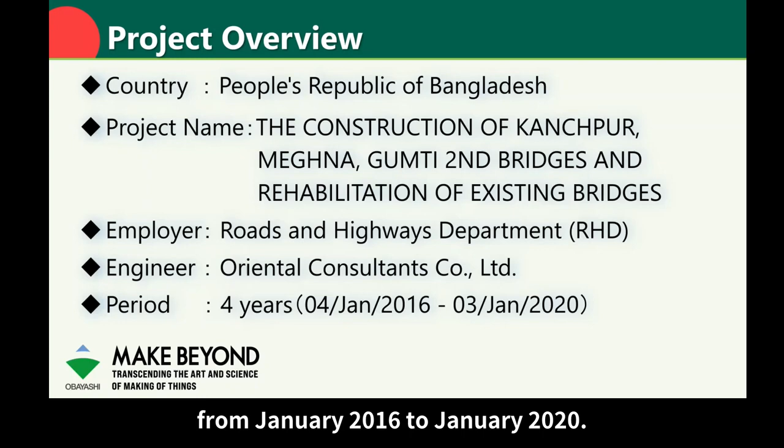I'm going to summarize the project. The country is the People's Republic of Bangladesh. The employer was the Roads and Highways Department of Bangladesh, and the engineer consisted of 9 companies, including Oriental Consultants Corporation. The construction period was 4 years, from January 2016 to January 2020. The contract scope was construction of new bridges and rehabilitation of existing bridges, including improvement of the surrounding area.

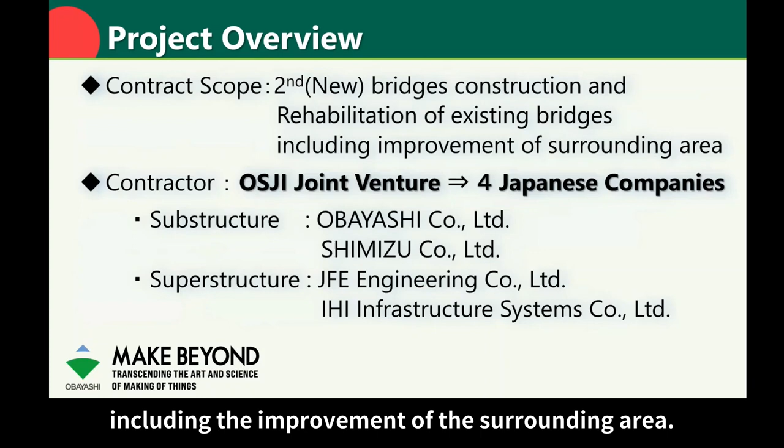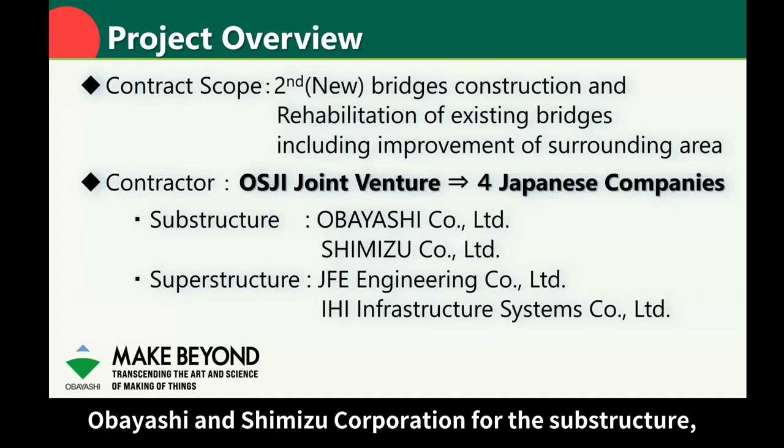The contractor was a Japanese joint venture of 4 companies, named OSJI Joint Venture: Obayashi and Shimizu Corporation for the substructure, and JFE Engineering and IHI Infrastructure Systems Corporation for the superstructures.

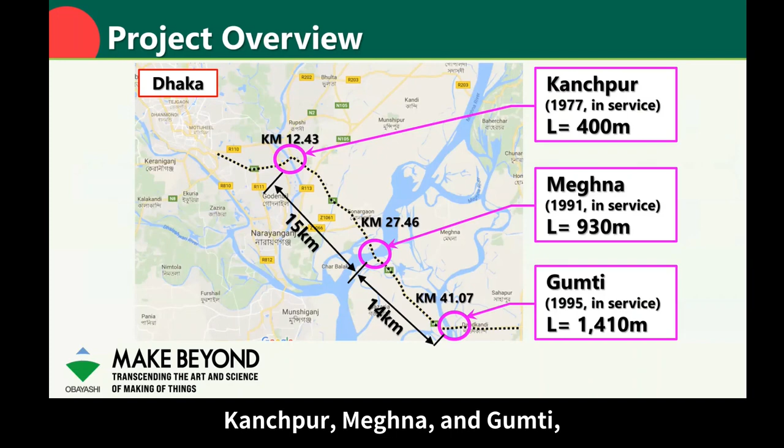The next is the project location. The 3 bridges are located at Kanchpur, Meghna, and Gumti, about 12 kilometers from the suburb of Dhaka, the capital of Bangladesh. This section explains the description of the new bridge construction.

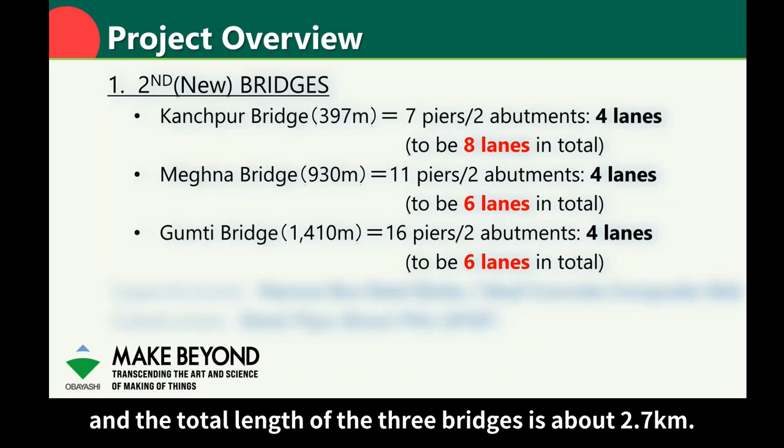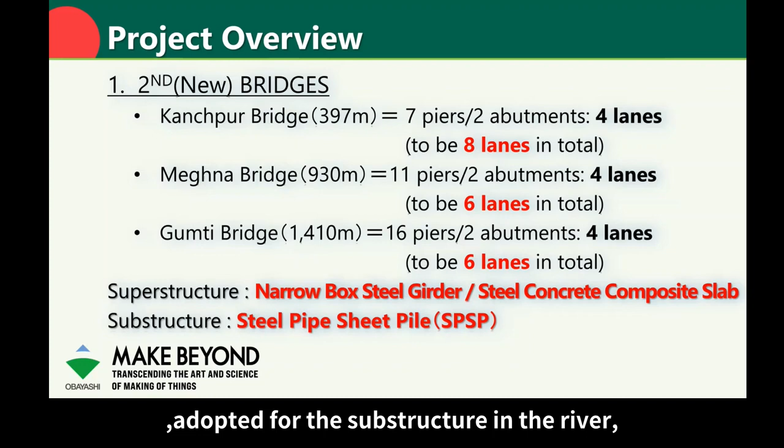The total length of the 3 bridges is about 2.7 kilometers. The superstructure is a combination of steel narrow box girder and steel-concrete composite slab, with steel pipe sheet pile foundation adopted for the substructure in the river, commonly called SPSP. This method was the first application in Bangladesh.

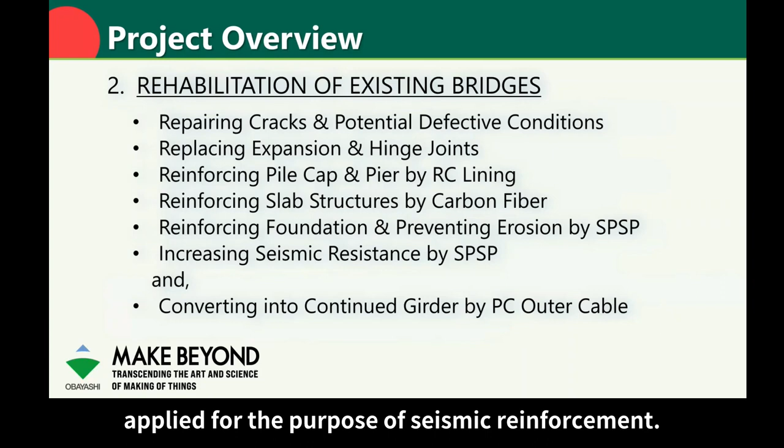Next, I will present the description of the rehabilitation of the existing bridges. As shown on the screen, 7 different treatments were applied for the purpose of seismic reinforcement. This was the first application of using carbon fiber for reinforcement and converting into continuous girder by PC outer cable in Bangladesh.

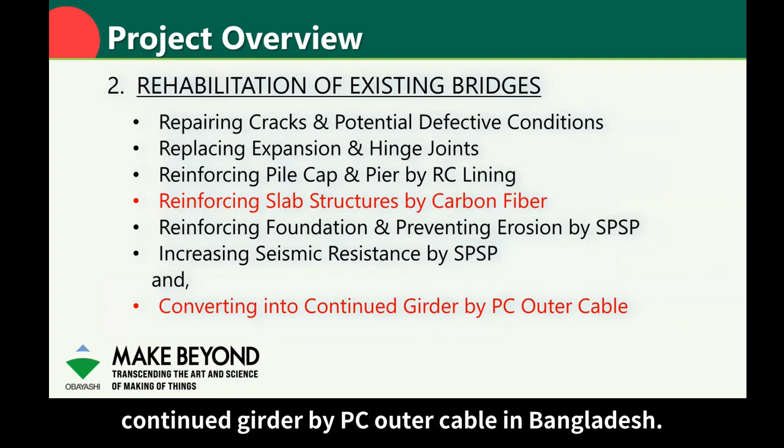This SPSP is a structure in which steel pipes are driven into the river and used not only as a permanent structure but also as a temporary closure wall to build the structure.

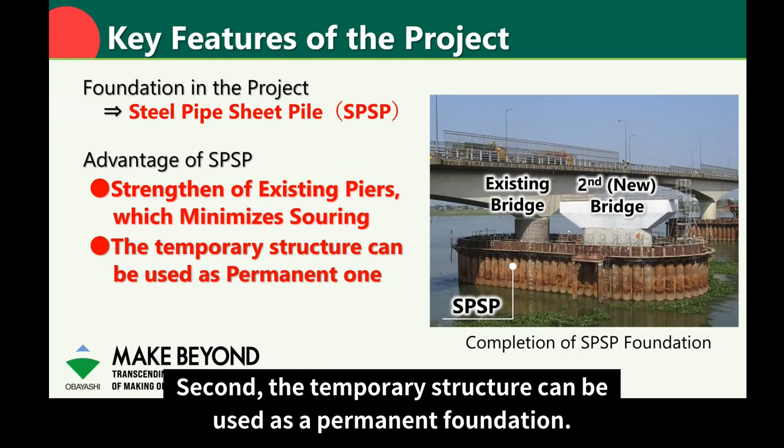There are 3 advantages of SPSP foundation as follows. First, strengthening of existing bridge piers, which minimizes scouring. Second, the temporary structure can be used as a permanent one. Third, it shortens the construction period.

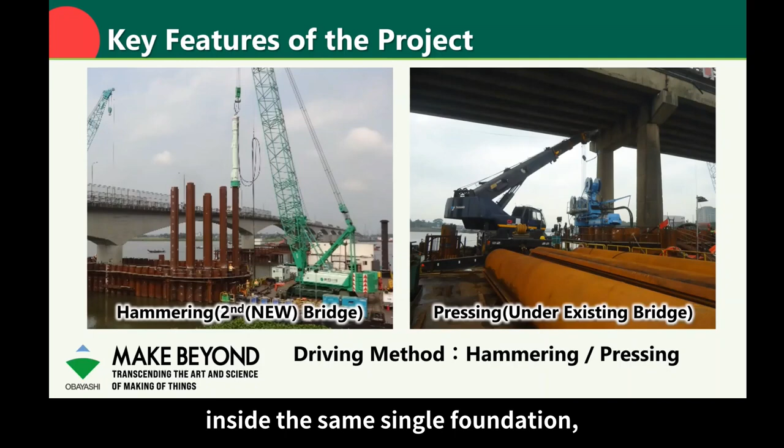The construction situation is shown in pictures here. 2 different driving methods, hammering and pressing, were conducted because both new and existing bridges were located inside the same single foundation, having a unique oval shape.

Next, I'd like to talk about the difficulties experienced through the project. In the beginning, we created ideas for improvement. As a result of the preliminary investigation, we found that there were many obstacles at the SPSP driving location. It was necessary to remove these obstacles in the river properly in order to complete the foundation on schedule.

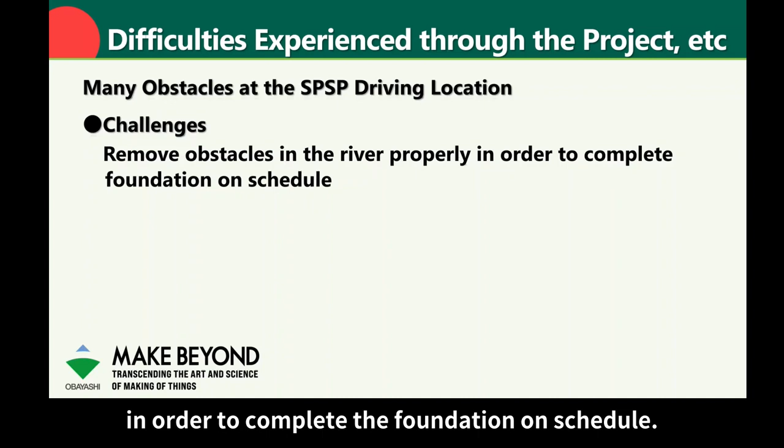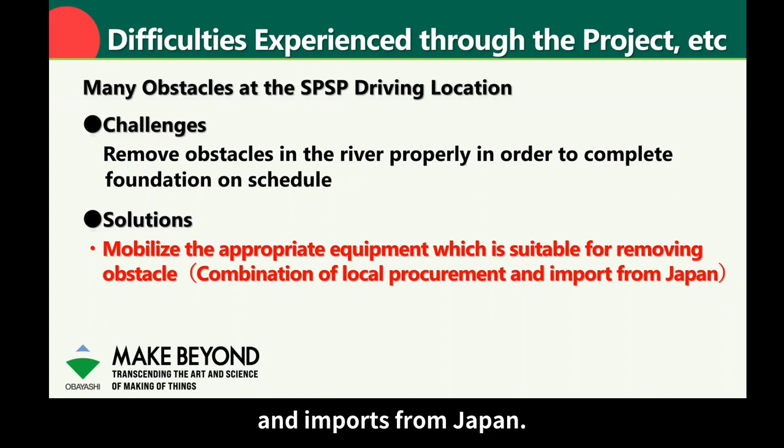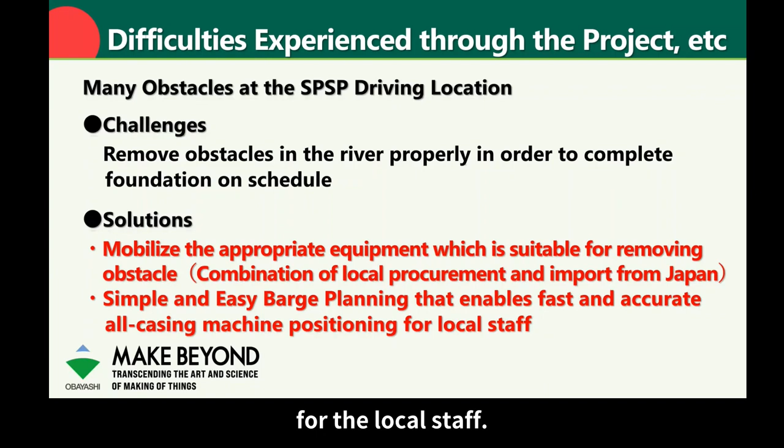The following solutions were put in place. First, mobilize appropriate equipment suitable for removing obstacles; the arrangement was made by a combination of local procurement and import from Japan. Second, simple and easy planning that enables fast and accurate operation of the casing machine for local staff. As a result, these 2 solutions enabled us to start the construction of SPSP on schedule.

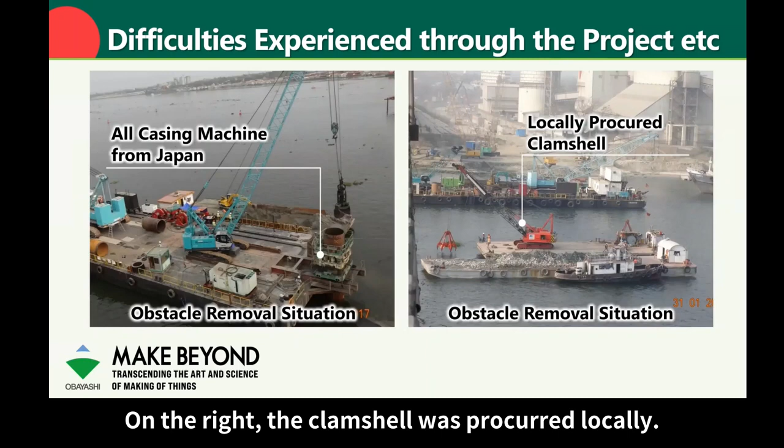The pictures show the local procurement and the imported equipment. On the left, the casing machine used for obstacle removal was imported from Japan. On the right, the clamshell was procured locally.

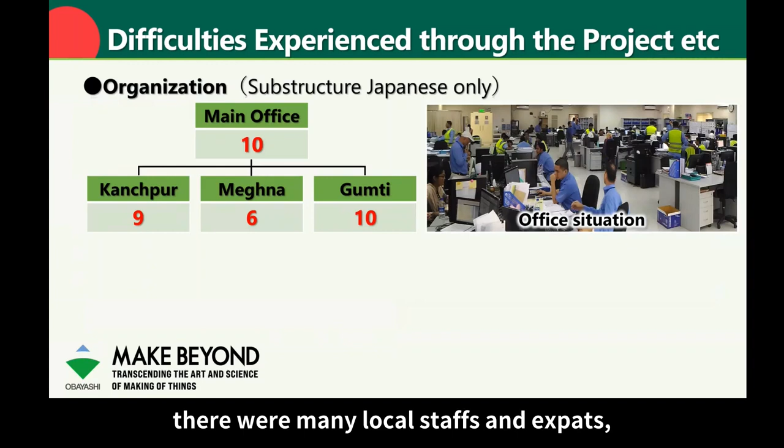Next, I'd like to explain what our difficulties were. This figure shows the organization of Japanese engineers for substructure work. Due to the simultaneous construction of 3 bridges, there were many local staff and expats, with a maximum of 412 local staff and 45 expats at the peak of the project. This number does not include workers and subcontractors.

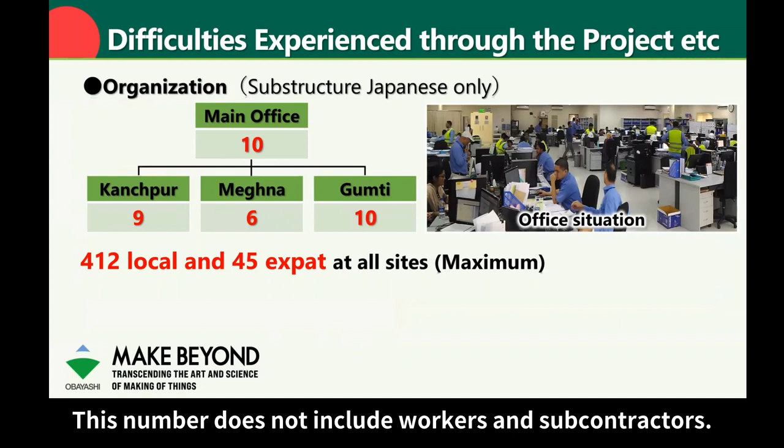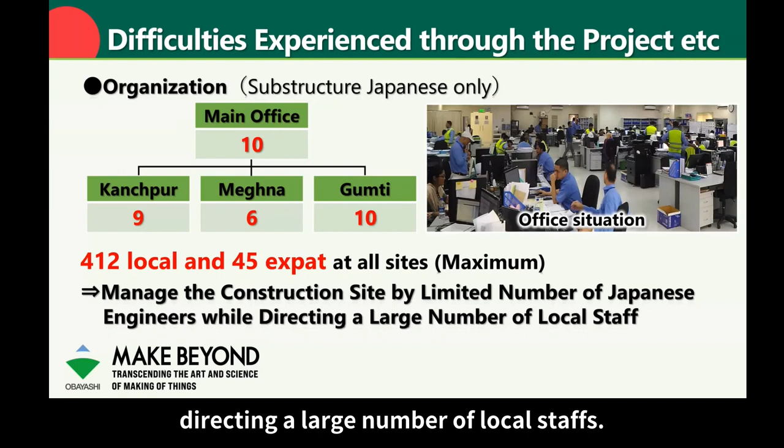Therefore, it was necessary to manage the construction site with a limited number of Japanese engineers directing a large number of local staff. The important matter is to carry out construction management while making the best use of individual ability.

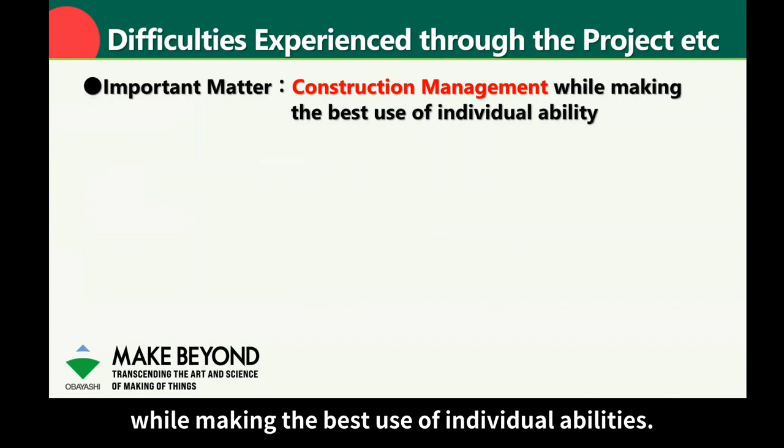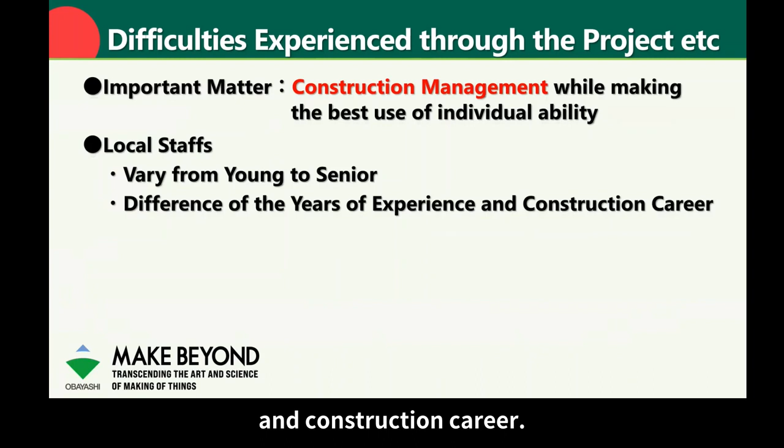In addition, local staff varied from young to senior, with differing years of experience and construction careers. In order to bring out our team's ability, we adjusted the organization to place the right person in the right place through daily communication and work with them. As a result, we were able to carry out construction management efficiently, maximizing individual ability.

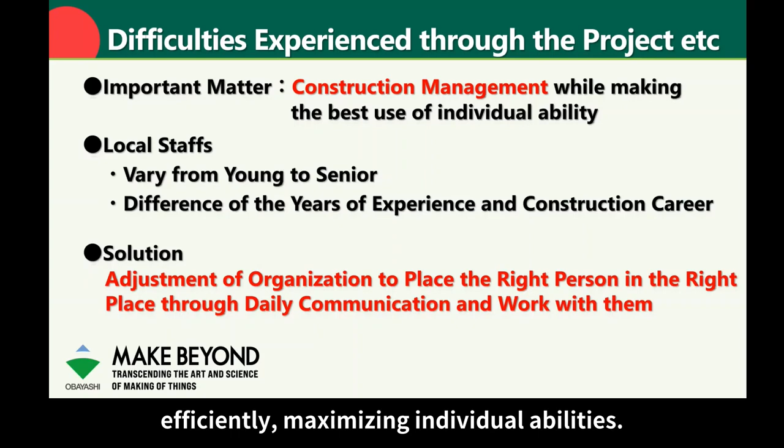Managing a site under conditions that differ from those in Japan can be a challenge, but the sense of accomplishment that comes from overcoming these challenges is a valuable experience for a civil engineer. If you have the chance, please take up the challenge proactively. Lastly, I appreciate the client, engineer, JV staff, and local people on this project, on this occasion again.